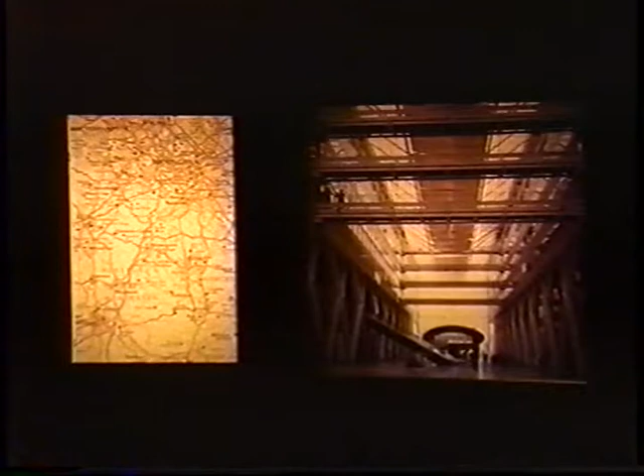It's nothing compared with Los Angeles, but on the other hand, Birmingham is a place you can drive to and park easily and get out of. The car and highway infrastructure is absolutely a double-edged sword, which London doesn't quite fall into—it's hard to get in, but also hard to get out. If you live in an ugly place like West Bromwich, it's very easy to get out, and although it's easy to get in, no one comes.

Here it is. Looks a lot like Los Angeles, really, doesn't it? It's a little expressway here. And there's the city centre, and that road along there, which you probably can't see, but neither can I really.

But that used to be, before the war, called the Golden Mile. It was called the Golden Mile because you could do everything here—this is where you would meet and greet people, this is where you would shop, this is where you'd have something to eat. There were restaurants and bars and everything else, and it was a great place to live.

Then, in spite of the destruction by bombing in the war, the real destruction came in the mid-60s with the city planners, who made an inner ring road around that and pedestrianised this part of the Golden Mile, then filled it with shopping malls. Everyone goes there, but it actually acted like a corset around this part of the city, which disenfranchised all of these people that live and work around here.

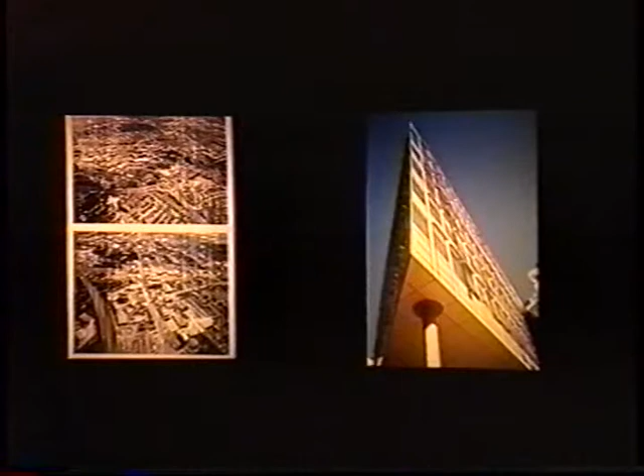This was the old civic centre here. Today, if you visit West Bromwich, there's a church here which marks the centre of West Bromwich, but the real centre of West Bromwich is a pedestrian crossing just there where people frequently get killed. It's a marvellous symbol for a town.

Now, when I got this job for this community arts centre, the idea was to put it just there. And when they gave me the job, I said to them, if I take this job on, you have to give me another job, which is to re-plan the whole of downtown West Bromwich. And much to my surprise, they said yes.

So the idea I came up with, because it's the only way I could start, was to say, let's get rid of this inner ring road, which they've agreed to. Let's move that inner ring road up here. This is a bus station just here. Let's move the Community Arts Centre into the middle here and move the bus station to there, which is next to the metro station, which goes down to downtown Birmingham.

And they said yes. But that was very important, because the building could not operate in the way that it should do if it was here. My client—

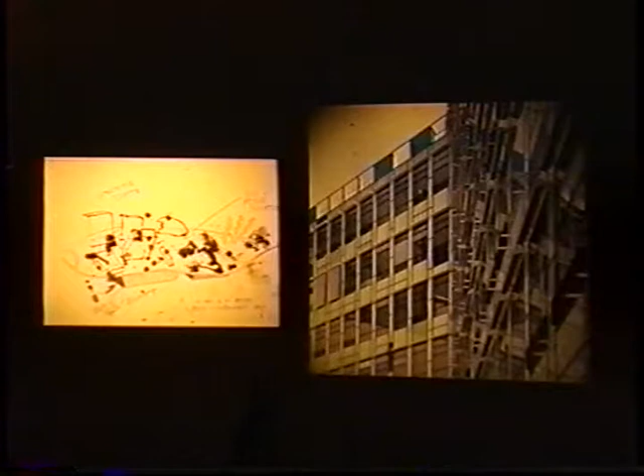have been operating as a community arts group in West Bromwich for 25 years, and they're very clever. They get money out of the health service, the education service, the prison service. They find that as a group of artists, very often sick people find it easier to go and talk to them than going to the doctor. And very often they find that these sick people aren't sick at all—they just needed someone to talk to, and artists are easier than doctors. They are in England, I don't know about here. It's only cheaper in England.

So how do you start such a project? How do you begin to work with these people who've been going for 25 years and actually touch every thread of society within this town?

I decided that we'd work with workshops. This is just one sketch of hundreds of sketches and models, and I workshopped real workshops—people had to roll up their sleeves and really work and draw and write to describe what this new thing called Cplex might be. I did it with old people, with sick people, with school children, with kids that didn't go to school, all sorts.

And there was a sense of ownership. This slide is just there so I can say that, really.

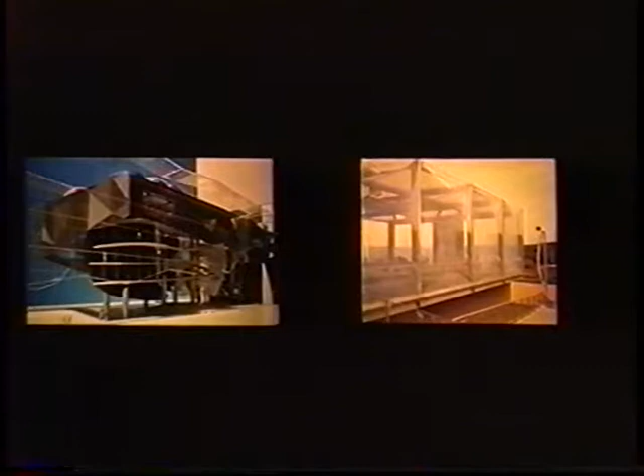At the working end of that, with the tower here, the idea is that by lifting up the skirt, you could allow people to come in and begin to enter the building in a way that they don't have to make a conscious decision to come into this part of it. And there'd be a bar, of course.

As you know, all architecture is ultimately about eating and drinking, whatever else the building might be called. There's a very large lift which becomes part of the event, and you come up to a street at high level called the High Street. There are shops up there, places to eat and drink, and some of these shops, like the tattoo shop, give you access to this underworld, which is the new type of gallery. There's dark space, light space, the remnants of the fly tower, and ramps going around.

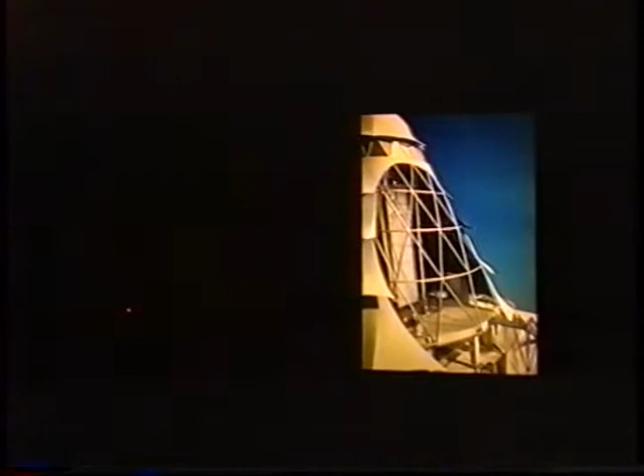This is a project we're in mid-flow with. It's going very quickly on that side, actually. It could be slowed down, that would be good.

This is the Black Sock. Here are the ramps, and there will be picnic places on these ramps.

In the last few weeks we've taken it a bit further. We've taken the tower off and made the building longer, because we could, but we've maintained the ability in the foundations here to create a higher place for future growth.

We've been examining the idea of this external facade with portraits of people in the glass. This is all glass, so in the day it looks like a solid object, although it would be highly penetrable, going back to the last image at base level, of all the people who have been part of the workshops. I like the idea that the facade of the building is fixed in time. But at night, of course, this all becomes transparent. I'm not saying that Elvis Presley lives in West Bromwich, but who knows, he might.

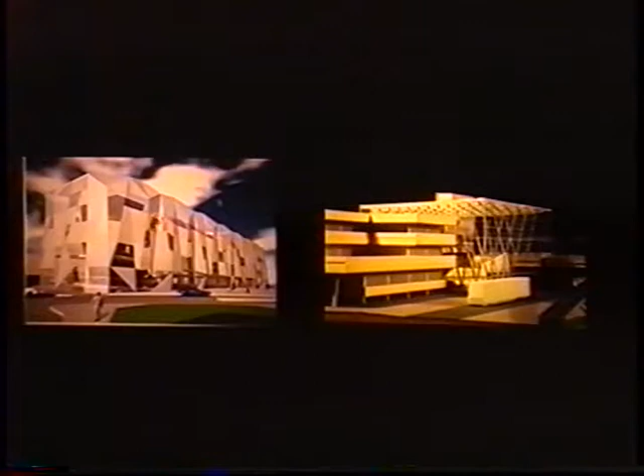And then actually articulating the skin a bit more. That's gone away.

And then bringing it back, this idea of the Golden Mile. There's the church. Demolition of buildings here, which has now been agreed. The idea of a large square.

This is a horrible sort of image in some ways, but it's very important, because now all the politicians have bought into this scheme of the large square. There'll be a new Safeways here, a big one, and I've invented a thing called the Silver Kilometre to cross the Golden Mile. That leads up to a wonderful park, a fantastic park up here, which at the moment you can't get to. And that complex, as a community art centre, sits in the very heart of the community.

And when West Bromwich Albion, the local football team, win the league, at last the people of West Bromwich have somewhere to come and celebrate. Sadly, it's very unlikely that West Bromwich Albion will win the league in the foreseeable future.

And as it evolves, we're now currently costing in to have a wall here that can completely slide off into that square, the enlarged square. So the square is now larger than the bus station site.

It's interesting to me that the original site, which was just the bus station, was given to this project by the local community, and now, through working very closely with them, we've developed a large piazza animated by the people who should animate such a piazza.

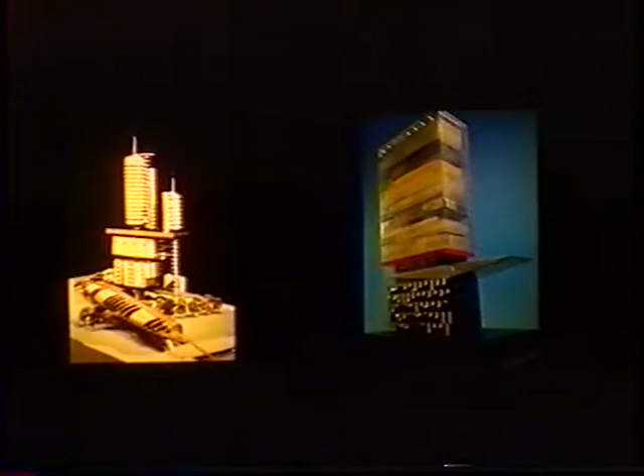The first idea was to do this. This is where the mayor invited four architects to make a single tower. That was the original idea, but I never thought a tower was the answer. I always thought a bridge was important, with some shops on it and an aviary full of parrots. Seemed to me logical.

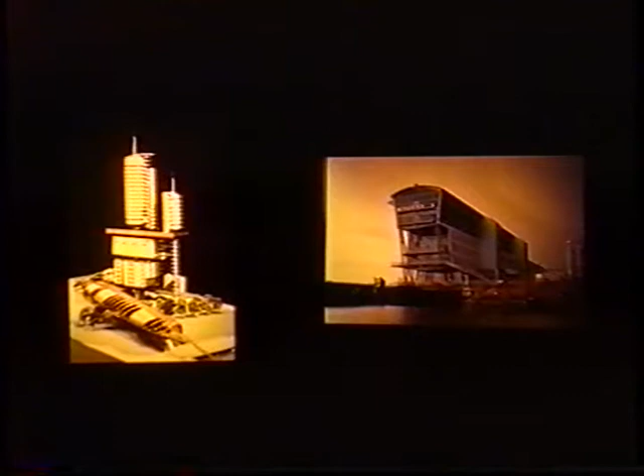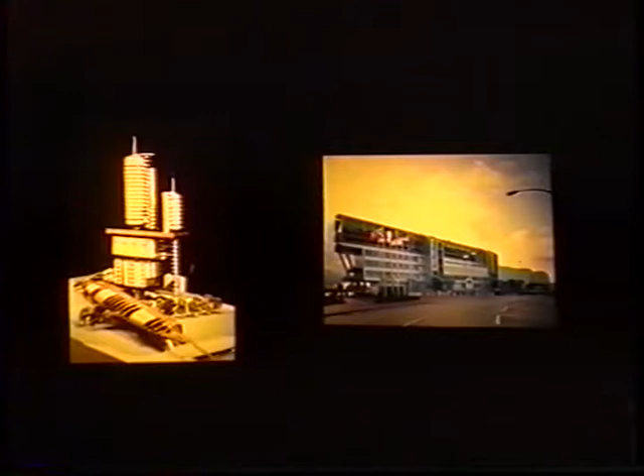And this is my first idea, which is based on the proportions of a Benson & Hedges cigarette packet, which the mayor didn't like at all.

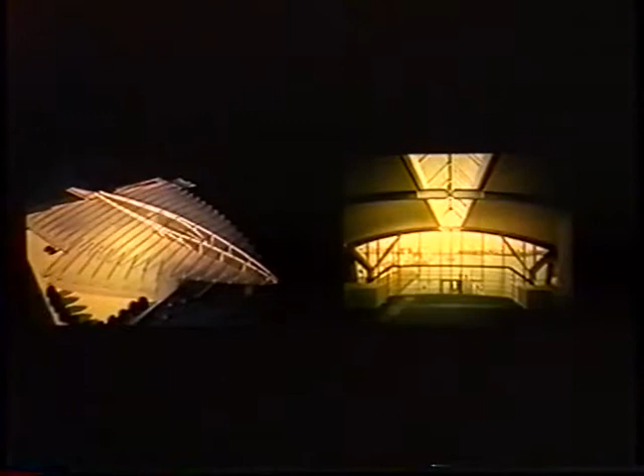And maybe I didn't either. So that eventually became this, where the shopping centre is underneath, and on top is the car park, on the basis that everyone messes around with the shopping centre, but no one messes around with the car park. And that would be the visible part of the architecture. This is an ongoing project, and every year we add a little bit and change it and adapt it. In fact it's not quite like this anymore, because it's a new town.

It's very difficult in new towns to regenerate some notion of a downtown experience. And when it's ready, this is what it will have. So it's a long-term project.

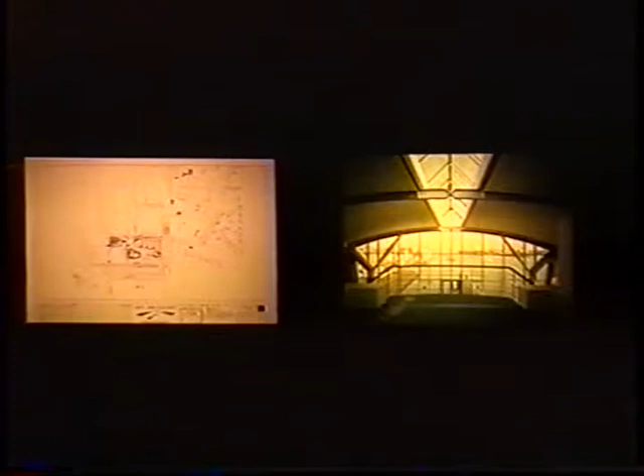Unlike this one, which is in Almere, about 30 miles outside Amsterdam. This is now under construction. What I like about Almere as a new town is that it's more than a new town, it's new land. When I was a boy, I remember being taught in geography classes about how the Dutch were actually creating this piece of land. Little did I know I'd come and dump a few buildings on it later on.

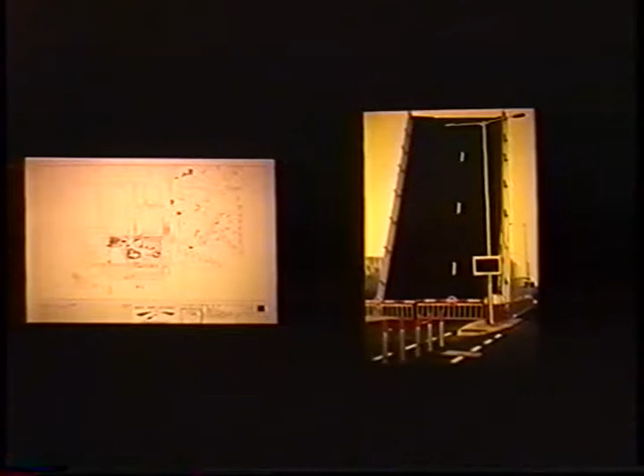This is within a master plan, and at the moment the population is about 150,000. In 10 years it will be 350,000 for this new town. But of course, when I was a boy, all of this was water.

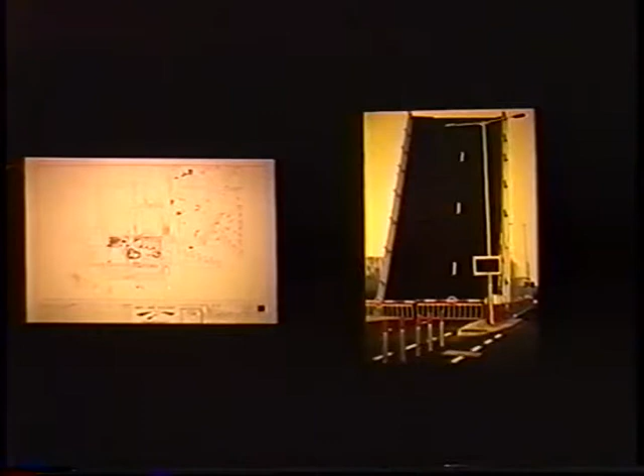There's a lake here. This is a master plan by Rem Koolhaas to create a new town centre here. There's a new theatre, from a competition which has just been won. And my project was this block here, which was originally set up as a city block.

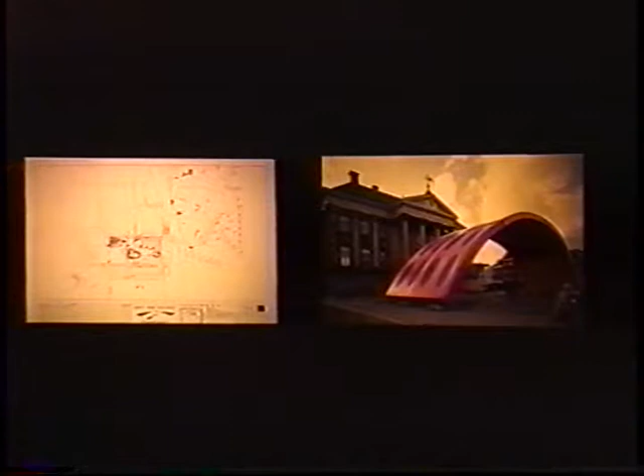So when I started this project, I retreated to the beach with a few sketchbooks and started sketching this sort of thing. And when you have 2 or 3 full sketchbooks, which is 50 or 60 evolving ideas, there's another one. The way I like to work is then to take it back to the client body, in this case the council in the town, and also the private investor, and talk and show them through these ideas. And then you can see where they begin to engage.

The Dutch said, well, we like it all, which isn't very helpful really, because I like someone else to feed into this process. So that was quite difficult for me. But in the end, we carried on.

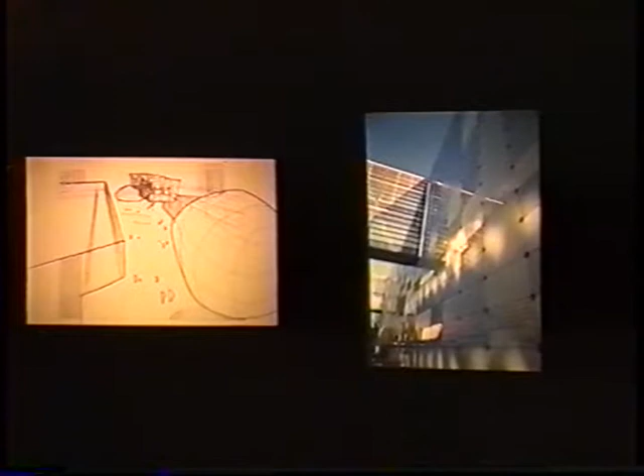This is a hotel. It's a rock concert hall. Underneath is a car park. And this is a new land level really, so it's raised up, because you can't dig very easily in Holland, otherwise you get a lake. There's shopping, a bowling alley, and a number of restaurants.

Here's the model of it. It's the rock concert hall. This here, the other side is white, and it's a special screen from the restaurant over here where you can project home holiday videos.

I like other people's videos. What I don't like is when they tell you about them, but I like looking at them. So it seemed to me that it's perfect. And that's what I like about the Dutch - you can talk about what's on the face of it a very small idea, and they say yes. And you think, God, I can't believe they said yes. No boring English person would have said yes. But they do. I think that's great.

There it is again, it's a big bicycle shed - the sort of building type you never get asked to do anywhere else except in Holland. Big bike shed. Of course, at school, the great thing about the bike shed was that it was the place where you went behind it to have a cigarette. This is the hotel, which is actually all in timber.

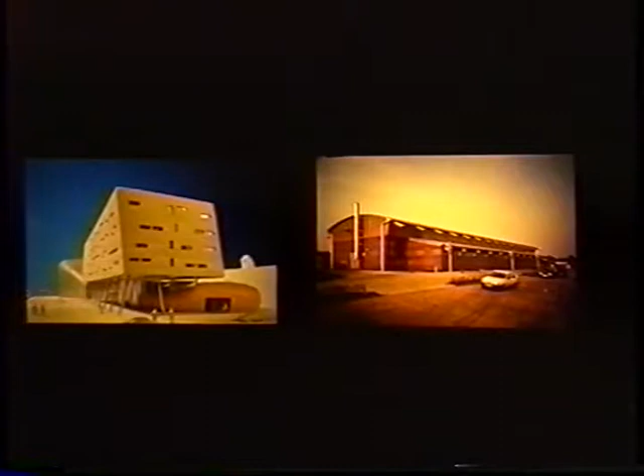You get down to Melbourne, and this project - I don't know if some of you know Melbourne, I'm sure. This is the River Yarra, and the central business district is here. Here you can see the nature of Melbourne, which is sort of 3 million people, a significant proportion of the whole population of Australia, and it spreads out 60 miles by 40 miles. So not as big as Los Angeles, but getting that way.

And it's that size because it all breaks down into 2-story and single-story houses with small gardens around them. It just goes out forever. And then it rises to between 40 and 50 stories in the central business district here. And this is the cultural centre, with a gallery, a concert hall here, another concert hall here. And what they want is a new museum of contemporary art, but they have no money.

This was an area which then qualifies for this museum - an old industrial area which is basically run down and defunct, just here. So there you can see the central business district, and there you can see the edge of the middle of town. It's very like Los Angeles now I come to think about it. And you get this area here.

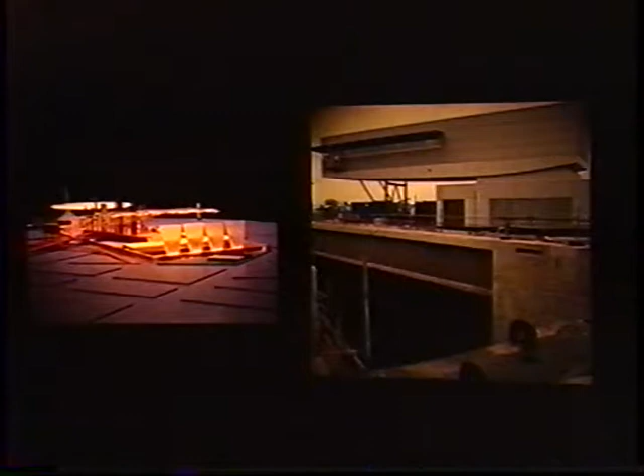Maybe there should be a second-hand car dealership here, because Australians really like second-hand cars. And with that, you then proceed to commission works of art. So it's a true contemporary museum of modern art. I like that very much. So the locals always have a reason to go back, because there's always something new, and it's always up to date.

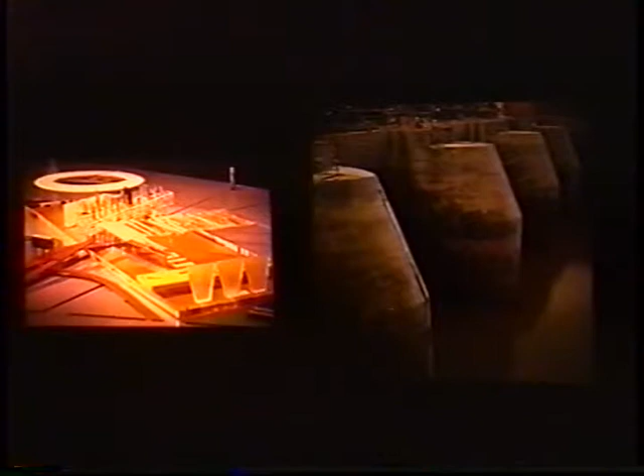All this other stuff is just me playing around, just to try and illustrate the sort of possibilities. Maybe I should have been purer there with just the car park and the rectangle, the orange rectangle. I think it's an interesting idea. And museums, particularly museums of art, are a real problem because they're dead.

Equally in Melbourne interests me a lot. The central business district is here that I was referring to. Here's the River Yarra, and here's their Docklands, which is quite a large area, separated by these railway lines.

They are now developing this, but when I got involved in this project, it was to report back on the initial moves of how to regenerate this. It seemed to me that the only problem was these railway lines. So I spent 2 days with VicRail, the Victoria Rail Company.

First question you ask them is, how many of these railway tracks do you really need? And the man said, all of them. Clearly he was lying, because if you go down there, most of them have weeds, they're rusty, and they're not used. At the end of 2 days, he agreed that actually they just needed 2 of them, which was quite a change.

There's a sort of lesson, really, that all people involved in large institutions, and railways are large institutions on the whole, always lie. It's very important - never accept the truth. Because if you can get rid of those, you can make the connections.

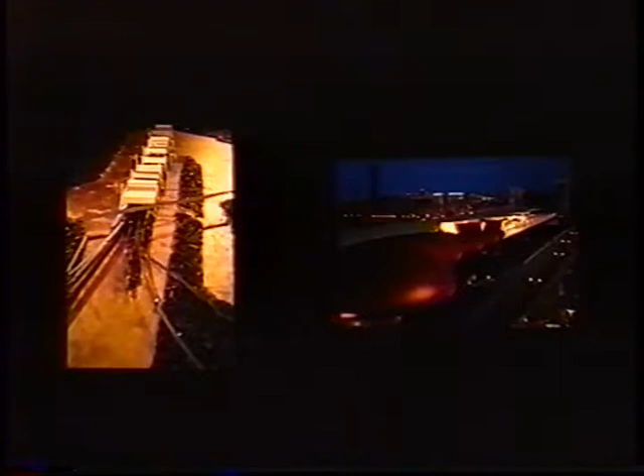And it's all about connectivity, this sort of notion of regeneration. So the idea here was that you just concentrate on how to get there, with roadways, with cycle tracks, with running tracks, with a long, thin swimming pool - just 2 meters wide, not too expensive. And if you can get people there, and then they can have a glass of beer at the end, then actually other people might build things in the rest of the site. That's what's happening. I mean, they're not doing the swimming pool, sadly.

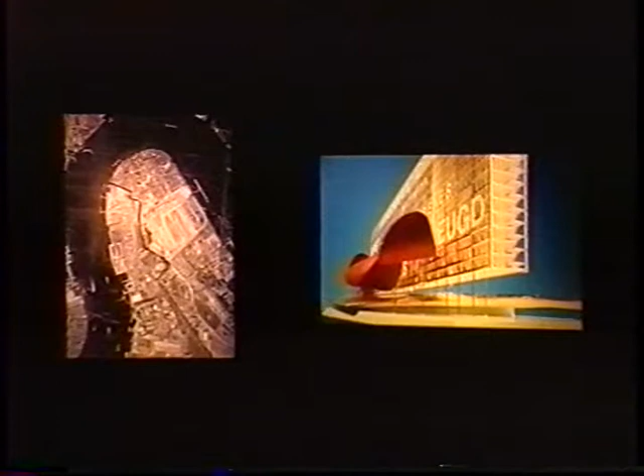But the idea of infrastructure as a form of regeneration is absolutely vital. And this is North Greenwich Peninsula in London. It's a very bad slide, deliberately, because the atmosphere in this slide is exactly what it felt like when I first went to look at this site.

It's an old gasworks site which belonged to British Gas, and the project I had was to build an underground, a metro station, more or less here. And this was back in 1991, I think, was the original request to do this.

British Gas thought that if they had a metro station, part of the Jubilee Line extension, running from central London through here, serving this, and then going on to Stratford East with a stop here, that would actually be enough to regenerate a development they wanted to do themselves on this peninsula. So, seemed a good reason to start.

Now this is going to be a cut and cover station. What that means is you dig a big hole, you make the station, and then you put the top back on. For a long time I worked to say, well, let's make it a cut and uncover station and keep it open. The idea that a wonderful hole, which is 400 meters long, 30 meters deep and 25 meters wide, would be a spectacular centerpiece for any development that might follow.

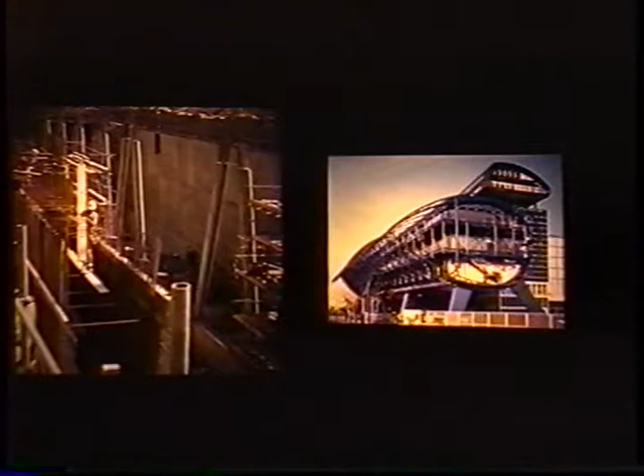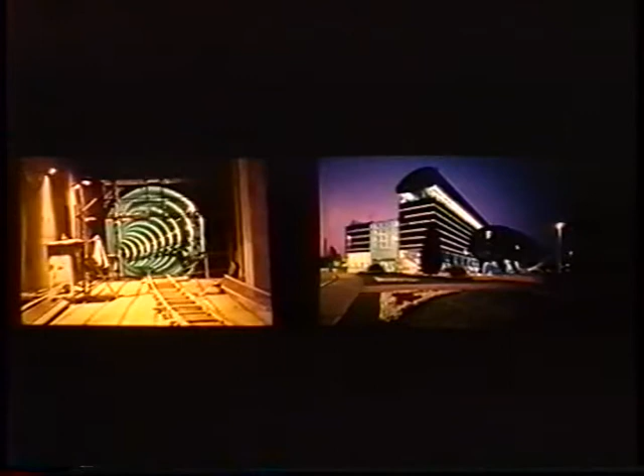The other thing I was intrigued by, building such a large hole, is that it then delivered you to a very small hole, which is the whole point of the big hole, if you see what I mean. Rather beautiful, this idea that you've been in this huge hole, and to take all the artificial light, which actually I've still done, back through into the regular tunnel where the train emerges. That would be very beautiful, this contrast.

And this is it, again under construction now with the roof on.

And then the result, which I made—well, some people thought I was being perverse, that I couldn't have a day-lit station, and therefore I made it like permanent night by making it very dark blue.

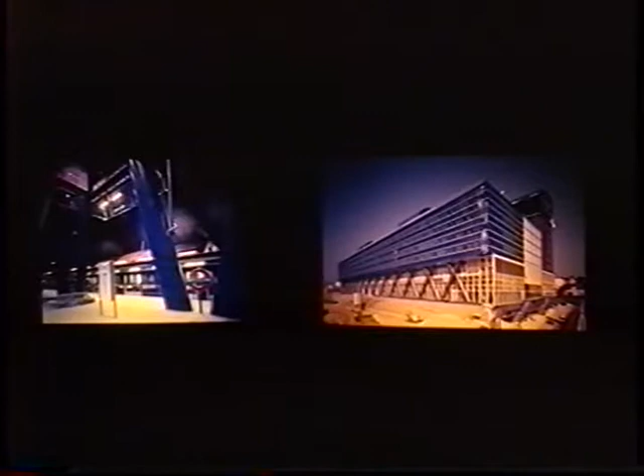But actually I did a lot of experiments with the notion of a large underground space, and what I was trying to do was put as little down there as possible, to open up the volume of the hole and maintain that, so you couldn't see the edge of the hole. If you make it a bright color, white or yellow or anything bright, then you see the edge of the hole and it's no good.

But if you make it a dark color—it could have been green, that worked quite well, but in my view blue worked better—then it becomes more of a sort of Piranesi type quality to the space, where you're not sure where the edges are.

And also I want to see the actual depth of the hole from—this would have been the garden, of course, without the roof—and then you can look down to the platform levels here.

Then, with the addition over the third platform, along the whole length of the station I put a Bristol blue transparent glass element here, which you can just see through. It actually hides some plant work, which you can see through there. But again, this whole side of the box, you really can't see the edge of—you know there's something beyond.

This is just straightforward blue glass mosaic on the columns and on the edge here.

What I found really satisfying is that when this project—well, it's been open a few months now—but when the Millennium Dome opened to the public on January the 1st, and the radio stations interviewed people about the Dome, they all said, 'We like the station.' I thought that was terrific. But I would, wouldn't I?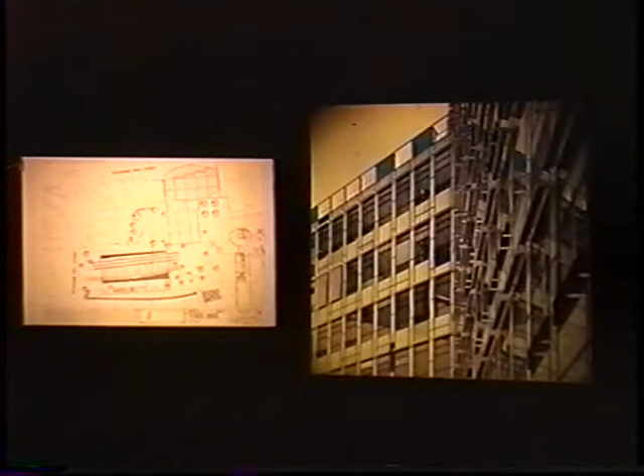Not so far away from North Greenwich is a place called Peckham. Peckham is an inner city area with a large multicultural resident population, and has a street called Peckham Rye, which is full of sort of normal shops. This is in the borough of Southwark.

And the borough of Southwark commissioned a firm of agents, or realtors as you'd call them, to do a study about the future of Peckham town centre. You must remember that London is a series of villages which are linked, so they're all with their own centres. And £100,000 later, these agents came back and said Peckham doesn't have a future.

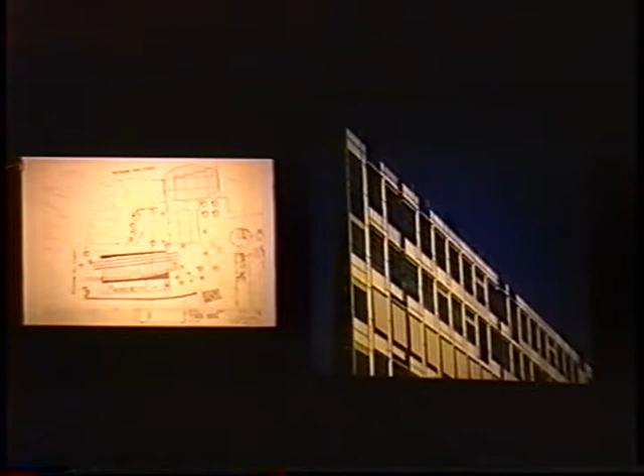That's a bit sad. But of course, what they were looking at was its future as a shopping centre. Well, it's already okay as a shopping centre, and there's no need for any other shops. But it needs some other things.

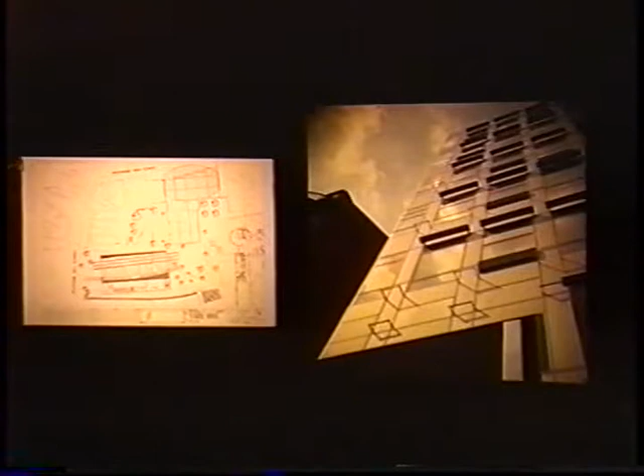So the Borough of Southwark decided they would use public money to begin to regenerate and create a sense of Peckham town centre. The first thing they did was build an arch by architects Troughton McAslan. I thought that was very clever - it's not a bad arch, it's quite interesting.

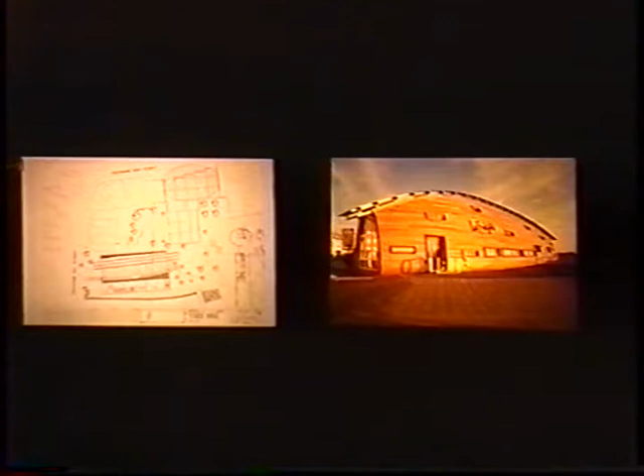Everyone started to talk about Peckham because of this arch, and all the locals said, well, that's a waste of money, it's an arch to nowhere. Though this actually was a canal down here, which they filled in a long time ago, and there's a linear park that leads to a much bigger park called Burgess Park, a new park in London.

So everyone hated this arch, not because of what it looked like, but because of what it represented. What Southwark didn't say is that they were going to build a new health centre and swimming pool complex with a cafe attached, and that's finished and open - I go swimming there from time to time. And furthermore, they're going to do this extraordinary library by me.

Here, new public library. They envisaged that I would just put a 2 or 3 story building in this slot. It's not a large project, this.

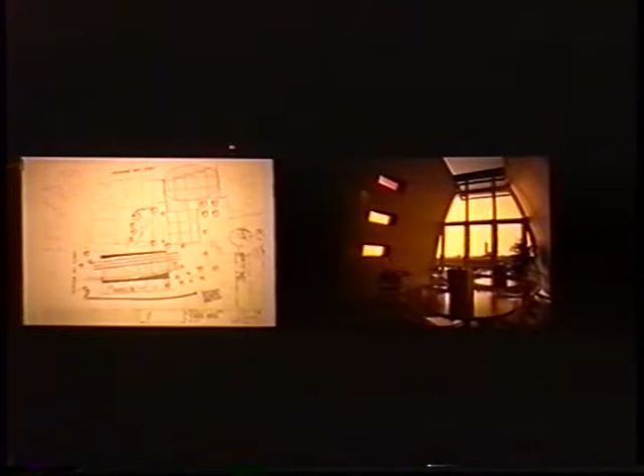And I thought that was wrong, because actually they've opened up here an alternative route from Peckham High Street, which is a very busy, smelly street. It's a street that if you're going to take your car through the tunnel to France, you tend to drive down it to get out of London, and it's not so pleasant.

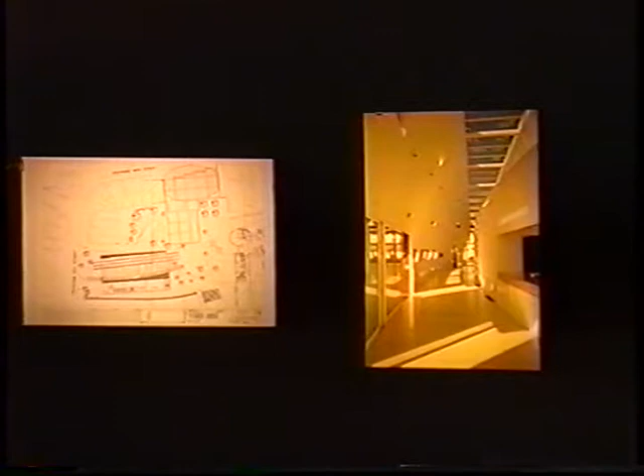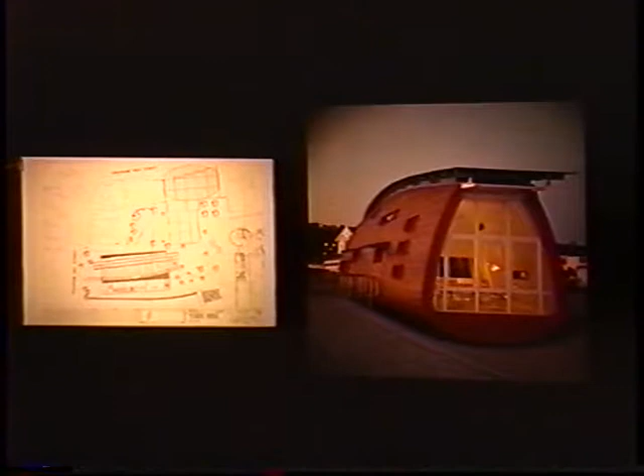But now it's possible to walk in through here, past here, have a bit of a swim, bit of a cup of coffee, go through this bit of new landscape which is still under construction, and then I want to make another arch, another gateway, to activate the shops on this street - an alternative way, going back to Almere, a series of routing around the town centre. So I did that.

There's the arch, and that's the area where the library is now standing. You see, it's a highly contextual building that is totally sensitive to everything that sits around it.

There's the arch - I'm sorry, these are under construction. Construction shots, but on the north side it's totally glass with different colours. That pink there goes onto the children's library at the top, and when you're inside and look back at Peckham through rose-tinted spectacles, it looks much better. This is all copper.

From the other side - this is where you walk through, these are the shops I was talking about. The main entrance to the library is underneath, and this is 11.3 meters high, which I learnt from Marseille - if you have the underside of a building, 10 meters will probably be okay, but at 11.3 you don't feel as though you're standing under a building. It feels like an intended space.

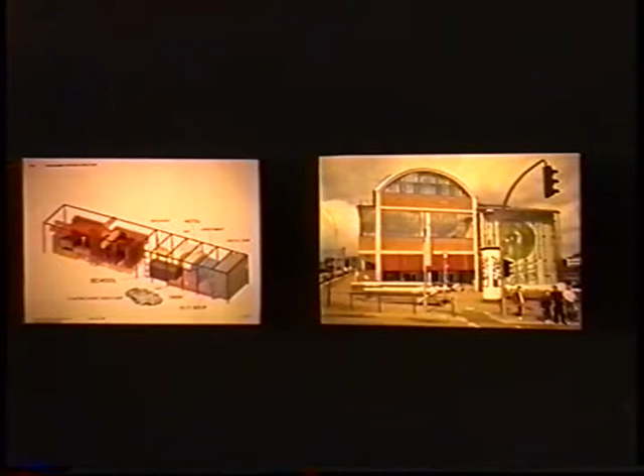But working with engineers, we found that we could actually remove two thirds of the columns on the underside of the silos, and then there's a basement. You can take away the slab here, so you can get about 9.5 to 10 meters from underneath the silo down into the basement.

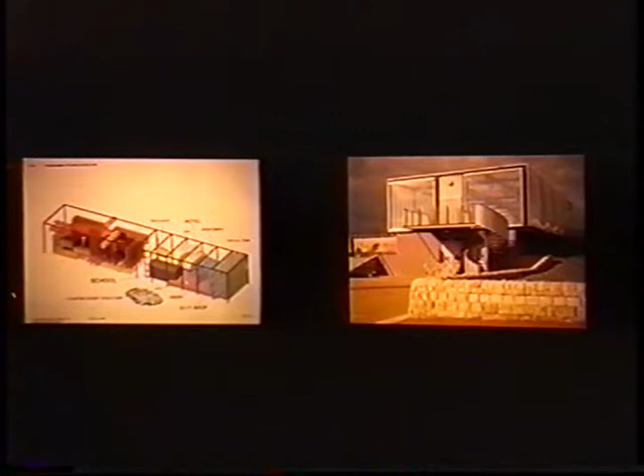And then I started to look at the location, of course, and there's a metro station here at the end of the building. This is all water in front. There's a metro station here, and on this metro line, on every stop, is a theatre or a cinema or some other sort of cultural institution, except on this one.

I began to think about calling this an opera house, or silo opera, if you'll excuse me. And I thought that was interesting.

I became interested then in the idea of having a building which is actually extremely difficult to use. And the idea that, from something I've been saying for a long time, or suspecting for a long time, that old adage I was brought up with, that form follows function, actually it doesn't. And if you go back through the 60s and the idea of the totally flexible building, which ended up in highly uninteresting buildings, the black box, that's not very interesting at all either.

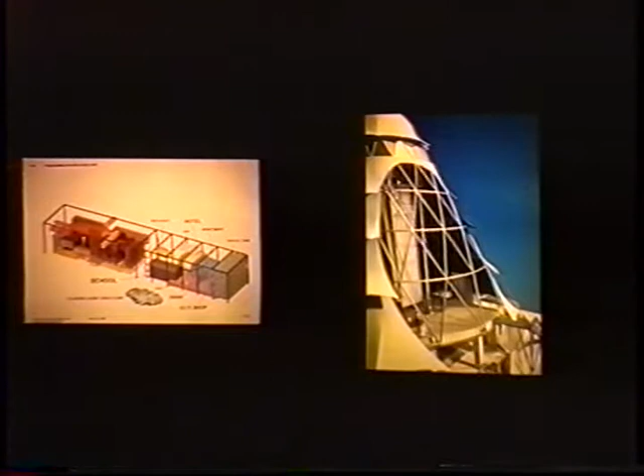And then I went to an opera of Madame Butterfly at the Albert Hall in London, which is not an opera house. It was the best production of Madame Butterfly I've ever seen, because the director and all the actors and all the singers had to work in a completely different way to make it work within this space which is not designed for opera.

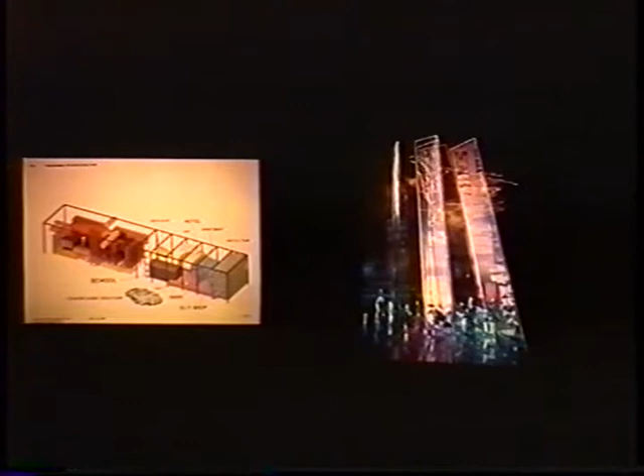Therefore, this could be an opera house. But equally, it could be, when there's nothing going on in there, still an opera, because it's like a spatial experience. There's one thing we can do as architects: make life better. We can create experiences. We are magicians. We can create things no one else can when we're at our best.

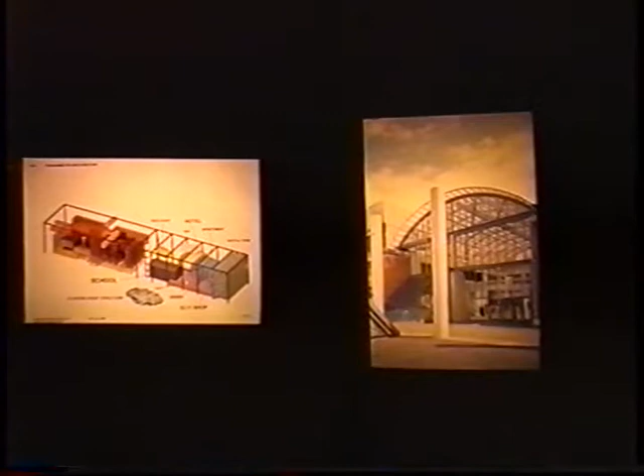But first you have to think about it, and then you have to sell it. And I've sold it here. There's another building coming up there. I said that would be a school. We're also looking at a lot of housing all the way down in this stretch on the waterfront.

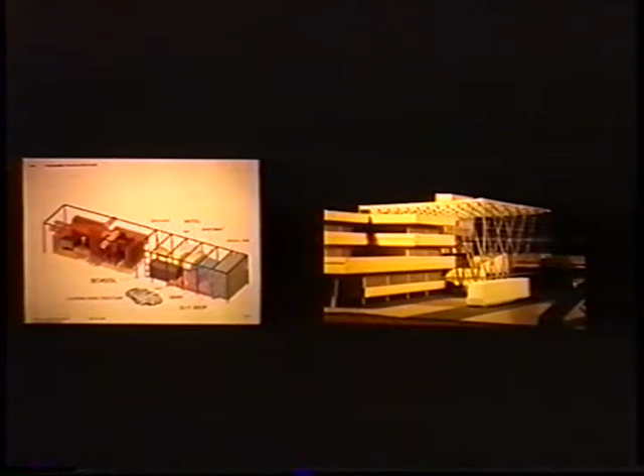Saying that this could also be funded totally by a very large hypermarket here. Not in terms of the capital costs, that's not a problem, but in terms of funding activities in this space.

So then I went to Menorca, as I usually do, to do a few paintings, a few sketches. I had to edit these slides a bit. I found that my assistant had put a few slides of me in front of these to give it scale, but I looked incredibly fat, so I took them out.

But this is one of my favorite places to work, and I think it's very nice, and very often I work with Bruce McLean, a Scottish artist, who's fatter than me, so I always like that because it makes me feel slim. And I like to work at quite a large scale. These are 4 meters by 3 meters. Now you can see the silo a bit better, and you see the context with the water.

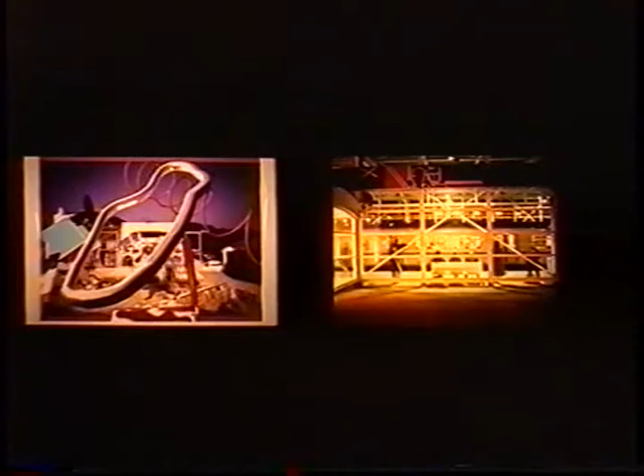From doing this sort of work, you start to deconstruct and imagine how this can actually break out into the space in front. These are always used with the art. And then you take that, and you take the photographs which become part of the work. There's Bruce, look. And then you start to work again on the computer to actually bring these out even further.

I've done a lot of these. I'm not showing you many tonight.

All of these things act with the client, with the neighborhood council, with the city council, where they engage in some interpretation of what you're exploring here. And what you're exploring here informs you of a number of moves you can make. Where we stand today on this project is that they've all agreed the basic tenet of the whole proposition is correct, and so we carry on working.

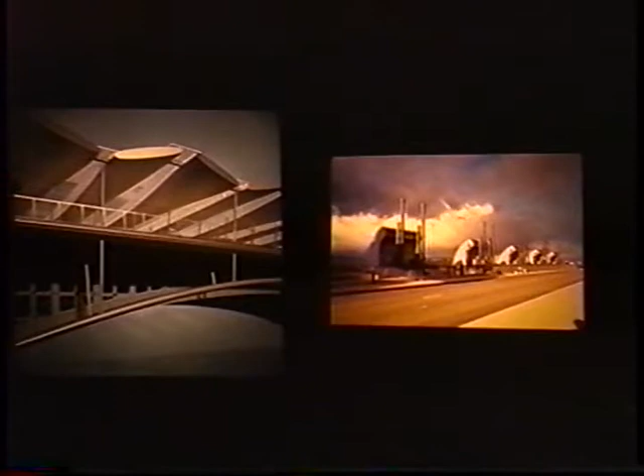I've looked very carefully here. I've changed—this is just a detail, it's the only slide I've got here—at making a monocoque aluminium structure which is actually twisted in the middle, acting as a beam, so I get a 35-meter span from this, so the actual structure forms a meaningful part of the roof, then with glass infill in between those. It's like a sort of twisted bow tie to give it the strength. This allowed me to take 1.2 meters off the height of the roof. The other side remains much as you saw it on that previous slide.

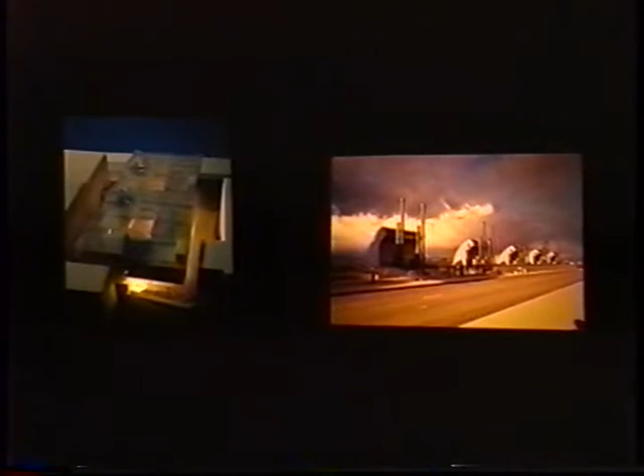And this is the dealing floors which will replace the Mermaid Theatre, but underneath is a new music theatre which will be in the ground. And that's the other thing opposite the Southwark Tube Station, lifting up the front to allow people to progress around here.

And the very last thing I want to show you, which interests me—this was done really for an exhibition—Liverpool Street Station in London is down here, and that sort of changed the equilibrium of the business heart of London and tended to push it through, and it's pushing up towards this area. This is a street called Brick Lane, which is full of Asian people with restaurants, and it's also a very important market, like a flea market, on Sundays, which runs through here.

And this is an old goods yard. The idea was how to regenerate this area, how to actually provide housing at a higher density. And what really interested me was the possibility of actually introducing new forms of development without actually destroying what's underneath it. So you leave the integrity, because this is all very important. I think it's important. And therefore, how can you put something there without actually changing what's underneath it?

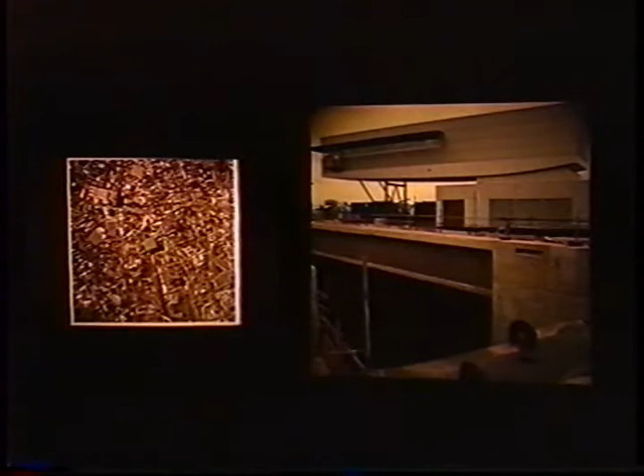There's a kindergarten in here somewhere, which I haven't got. And then underneath, already as we're sitting here now, there are artists busy within the existing structure who've actually planted a garden with displaced seasons, so that in the summer you get autumn, in the autumn you get winter, in the winter you get spring. So it's like playing with time under here.

And all of that came from a whole range of initial sketches, but this one in particular, I've always been very impressed and excited by some, not all, of the black paintings by Goya. On some of those which reside in Madrid, you see these huge rocks flying over a fairly conventional landscape. And this whole idea of things floating and residing over an existing and familiar landscape comes from this.